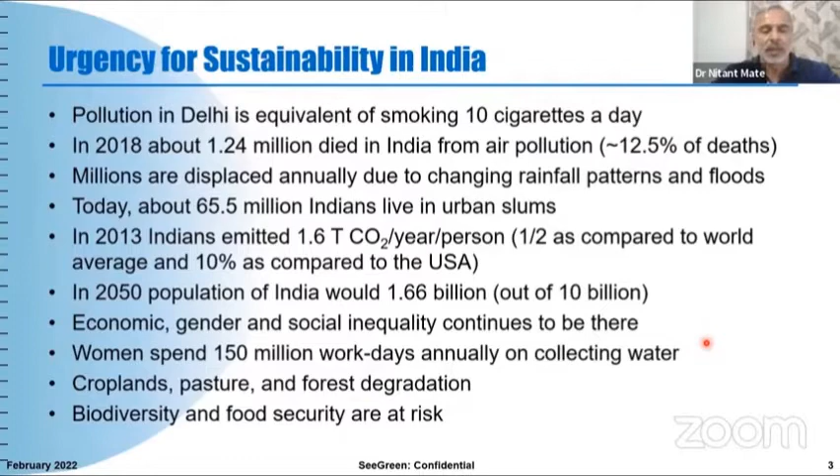We require energy for everything. We require fuels for domestic heating, commercial establishments, industries, fuel for transportation, commercial entities and institutions. We require electricity for lighting and other applications, and the list goes on. So we are definitely dependent on energy, and that is something we cannot run away from.

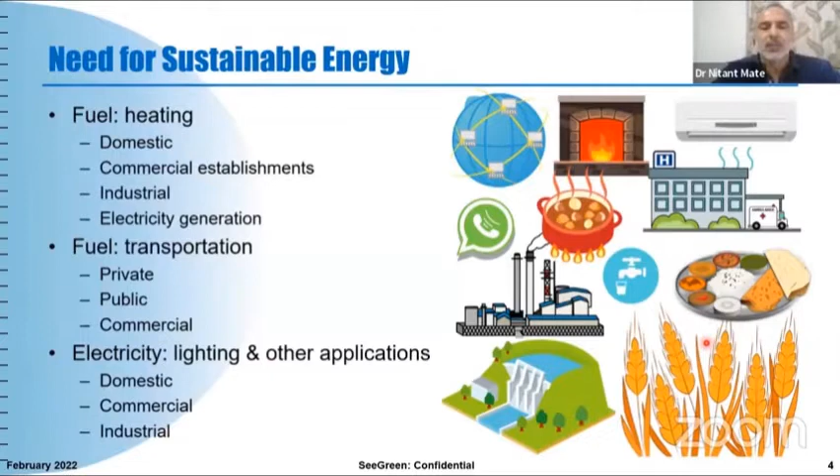And when we use energy, we get into the aspects of pollution. So when I'm talking about renewable energy, I would always look at emissions as one of the most important factors.

Also, when we look at energy, we have to look at sustainability of the energy sources and sustainability of the country as such when using that energy.

Otherwise, we start looking at one and we start creating problems in the other. The classic example - we solved our food problem by getting into the green revolution, and then we created a problem with the land by putting more and more fertilizers, reducing the overall organic carbon from the land, releasing all that carbon out, and that is also adding to the emissions today.

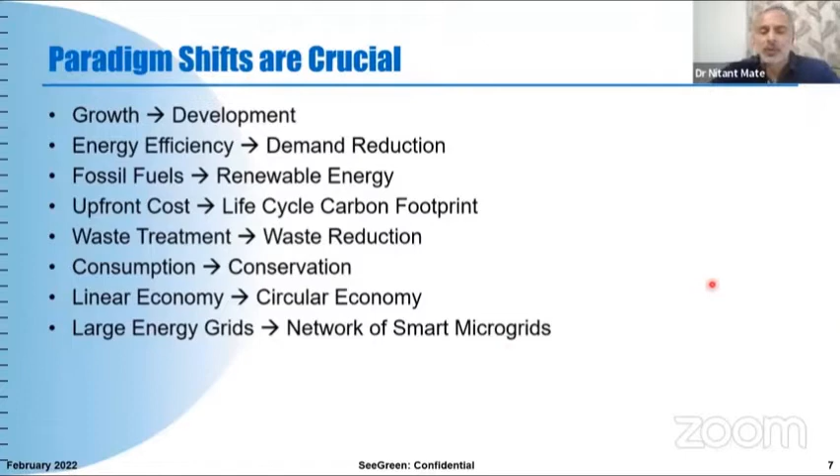Waste management is something we are looking at, but I think the first thing to do is reduce the waste - waste reduction is what we should be looking at. We are talking about consumption, we should be really talking about conservation, and then linear economy to circular economy. And I think the most important aspect in the whole thing is we are looking at large energy grids - instead of that, we should be looking at a network of smart microgrids. And that's the future of energy.

So when we start understanding energy, we have to also look at emissions. And here's a quick look at where we stand. Siddharth talked about scope 1, scope 2, scope 3 emissions - there is a pictorial representation of that.

Essentially, scope 1 is going to be what you burn in the zone that you are looking at. He talked about the Pune metropolitan region - so whatever you are burning in the Pune metropolitan region actually emits directly in the region. Even the solid waste that we generate adds to the waste in the Pune metropolitan region. Of course, the vehicles add to that and so on and so forth.

I think most importantly, scope 2, which was about 42% of total emissions, is something we should look at, because that comes from electricity which is not produced in the area where you're looking at the emissions. This is a very important aspect when looking at the total energy scenario of the country.

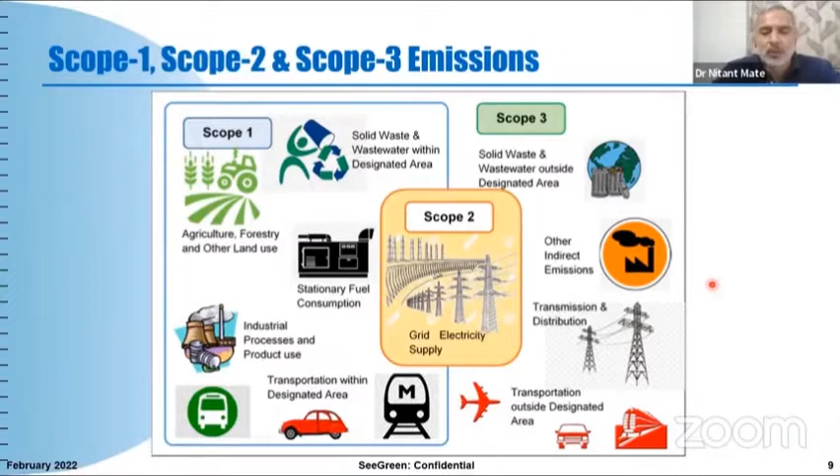Scope 3 emissions happen outside of the zone you're looking at, but they occur because of the consumption you're doing in that zone - be it food, transportation, traveling outside your zone, and so on. So let's quickly look at what is happening inside your zone in terms of emissions when you consume fuel.

This is a table I want to quickly explain. Any fuel you use typically is associated with emissions. The first column gives the fuel, and the last entry is electricity - I'll talk about that as well.

When you're using diesel, 1 ton of diesel actually emits 3.14 tons of carbon dioxide. If you're using gasoline, there's another number. CNG is 2.75, coal is 1.51. The last entry is electricity - every megawatt hour of electricity we use leads to 0.82 tons of carbon dioxide emissions.

You can also look at the calorific value of fuel and how much work that burning of that fuel will give you if that entire energy was converted into work - looking at kilowatt hours per kg of work at 100% efficiency. The numbers are great, but that's not the reality. That is not what is happening.

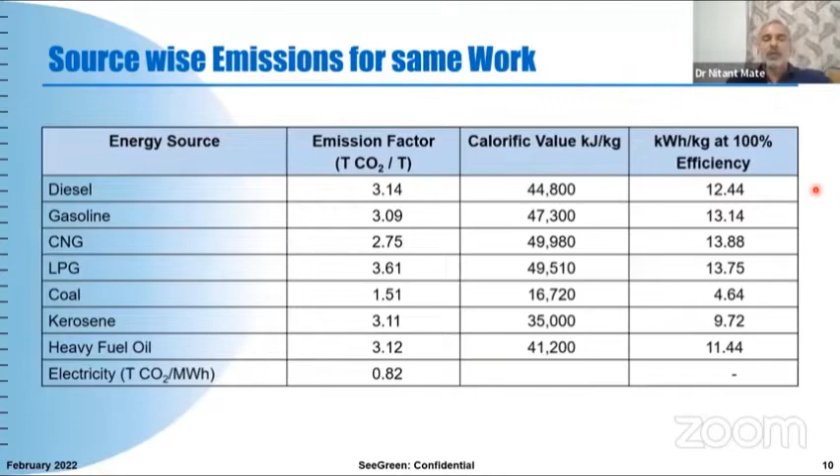Now if you look at this table, it's a table on 2 pages - a very busy table. I'll quickly explain. What you're looking at here is the different fuels in the first column, then the different applications we use the fuel for, and then the third column gives the typical efficiencies of these applications.

Then in kg, if I were to produce an output of 1000 kilowatt hours - that is 1 megawatt hour - from this particular fuel at this particular efficiency, how much fuel will I consume? And if I know the fuel consumed, I can calculate based on my earlier table how much I'm going to emit.

I'm putting this table in perspective because I want each of you to understand that if we want to do some work - say taking an elevator from ground floor to 10th floor - the work done is the same whether I'm using electricity, a diesel engine, a gasoline engine, or even steam. So how do we compare everything? I think the best way is to look at the output work we want, see what input we have to give, and then work out the emissions for that input.

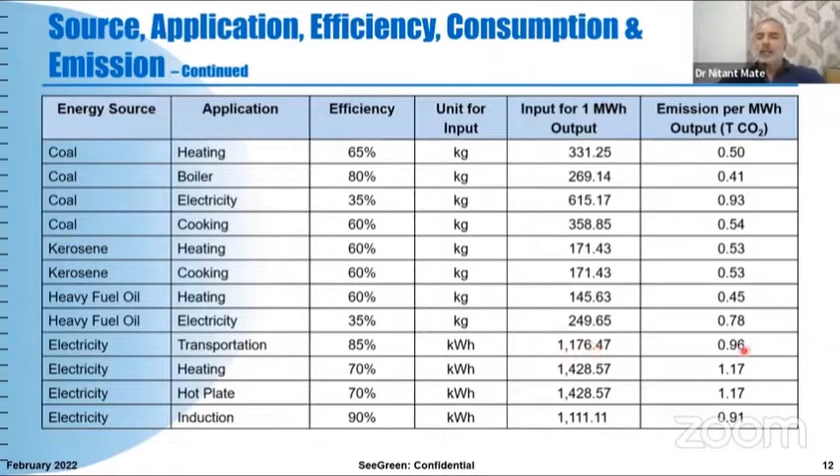If you look at transportation as an example - because I really want to drive this point home - using electricity for transportation, the efficiency is very high, about 85% conversion. If I want to produce 1 megawatt hour of output using electricity, I need about 1.1 to 1.17 megawatt hours of input, which leads to about 0.96 tons of carbon dioxide emissions.

Now I'll go back to the earlier part of the table and look at what happens if I use diesel for transportation instead.

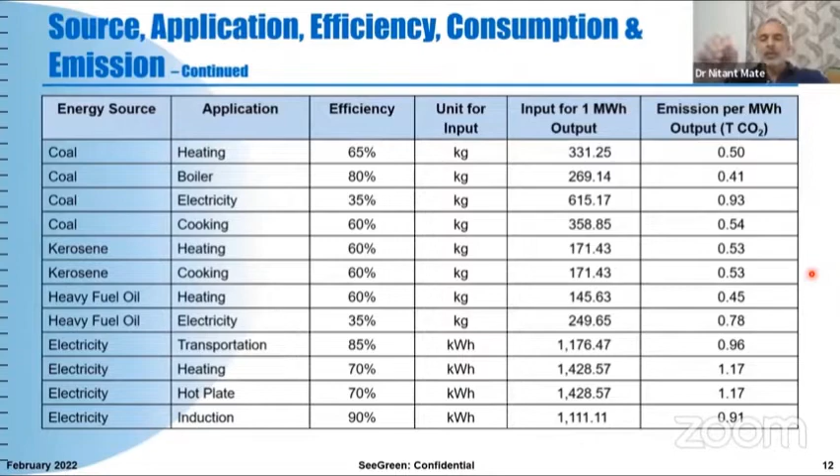And if I use CNG for that, my emissions are 0.57. So all of us are looking at electricity to be the least polluting input for transportation. But what this table is telling us is that for the same output, if we are using electricity for transportation, electricity is the maximum polluting entity. Now, this is completely counterintuitive, but it is very important for us to understand that there are two different aspects: one is energy efficiency and the other is emissions. And if we are looking at carbon neutrality, I think emissions take priority over anything else. That is something we have to keep in mind going forward.

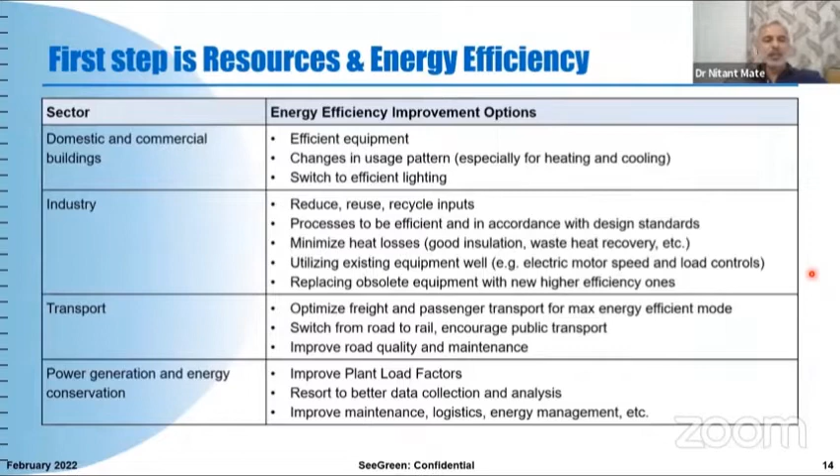So what are the solutions for that? And what are the sustainable solutions, and what are the solutions that are going to give us energy security? Of course, the first and most important thing is, as I said, efficiency for resource use. So we have to make sure that we don't consume too many resources. We have to look at energy efficiency, because renewable energy or anything else comes later. First is you reduce your consumption, and this table gives various measures one can take for domestic, industrial, transport. I'm not going to go into details of that, but energy efficiency is number one.

When we are looking at energy, we can look at energy and matter, and they are interconvertible. On Earth, if we are producing energy by using matter, then we have to remember that matter is finite, and we have to avoid doing that. There are a number of ways - there is gas, there are solids, there are liquids, you can burn them. Even nuclear energy is there, but all of them are finite resources.

Fortunately for us on Earth, we have an infinite source of energy, which is coming from outside of Earth, and that is the sun. So we should be finding ways and means of harnessing the sun. Of course, solar photovoltaic, solar thermal is there, wind, hydro, bio are all the ways and means of harnessing the sun.

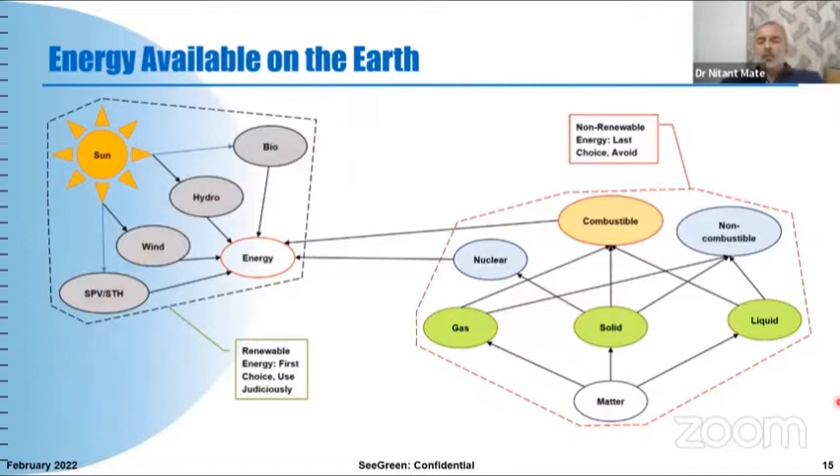What happens in India? Do we have enough sun? Do we have enough potential? Fortunately for us, India has got excellent potential being a tropical country. We have 3.28 million square kilometers. Our average solar radiation per square meter on Indian soil is 5.5 kilowatt hours per square meter. Now, if you look at this number, it is about 7.5 times the total annual energy consumption of India coming to us in a day. So I don't think there is any doubt that we have enough energy available. It's a question of how we use it.

Do we have sufficient rainfall? Yes, we do. 1.05 meters is the total average rainfall on the entire area of India. That is enough water to give 2 crop cycles, and probably have more for the third crop cycle, and enough to drink and enough to keep for the next year if there is partial drought. So it's a question of managing. We have large cultivable land that we can use.

Wind potential, of course, every year the wind potential is increasing because the technology is improving, and we have got about 300 gigawatts of wind potential at 100-meter mast height, and 700 gigawatt when it goes to 120-meter mast height. Bioenergy, of course, we have very large potential of 42 gigawatts with excess biomass that we have. And most important thing about India - we were talking about economics, we were talking about funding - we have a very large population. That means we have a large in-house market. We are 20% of the world. We have economy of scale. So we should not be looking at funding from outside. We should be looking at funding from within.

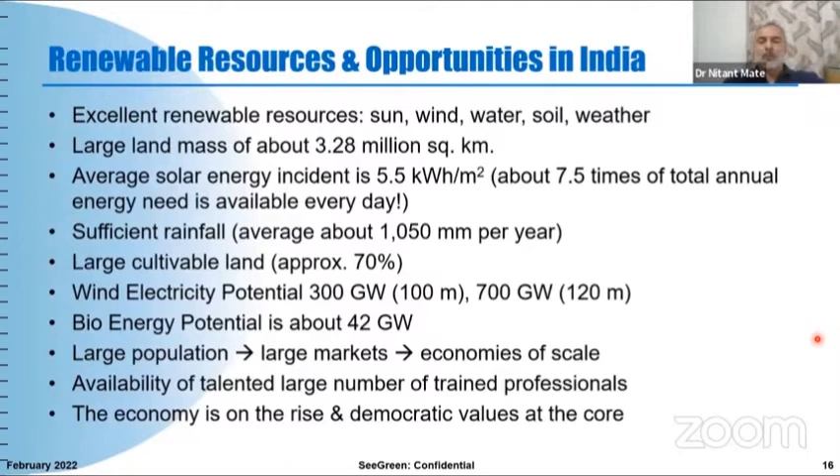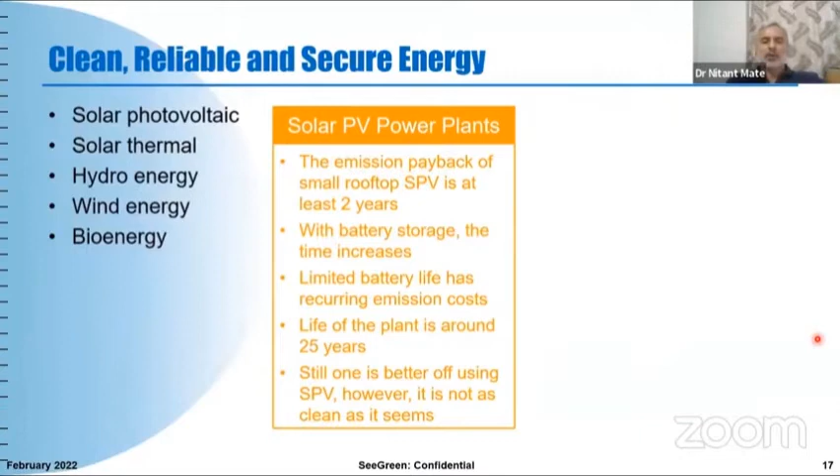So we have solar photovoltaic, solar thermal, hydro, wind energy, and bioenergy. What happens? Are these really green? Is something that we need to ask ourselves. Do they pay for their own emissions? And if you look at solar photovoltaic, it pays for its own emissions in at least 2 years. And bioenergy, if you take an example, it has got a life of 15 to 20 years, and it pays for itself in less than 2 years. So essentially, if you really want to go green, the first step that we need to do is focus on the core sectors going green.

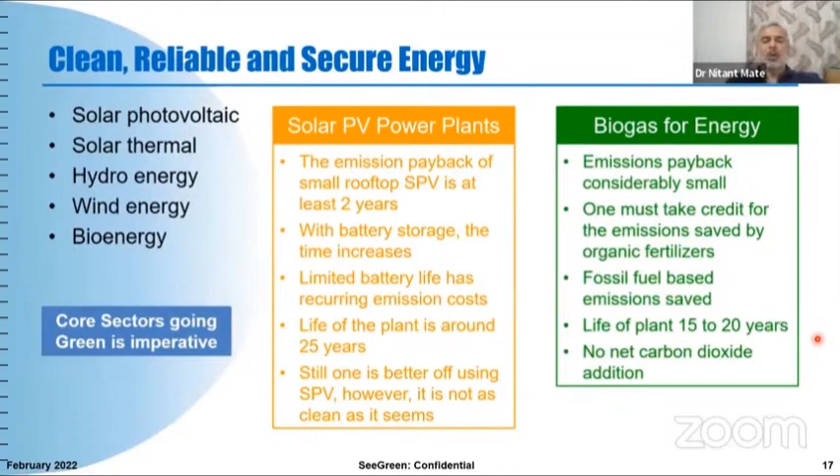And that is imperative, so your embodied energy and embodied emissions are green. Once that happens, I think we have started walking the path. And the economics of renewable energy, I'll wind up in a minute. I just want to spend a minute here.

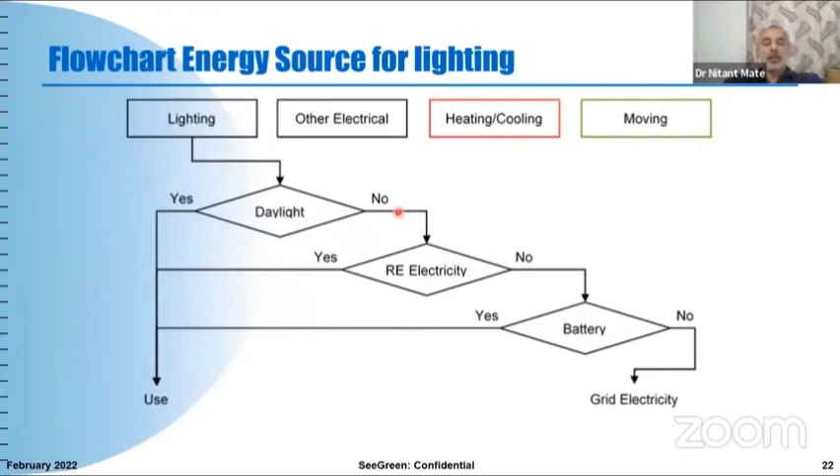So we have energy source selection. There are different applications: lighting, other electrical applications, heating, cooling, and moving. Here's a quick algorithm we can use. If you have lighting, go for daylight. If not, go for renewable electricity. If not, then go for battery. The worst is grid electricity.

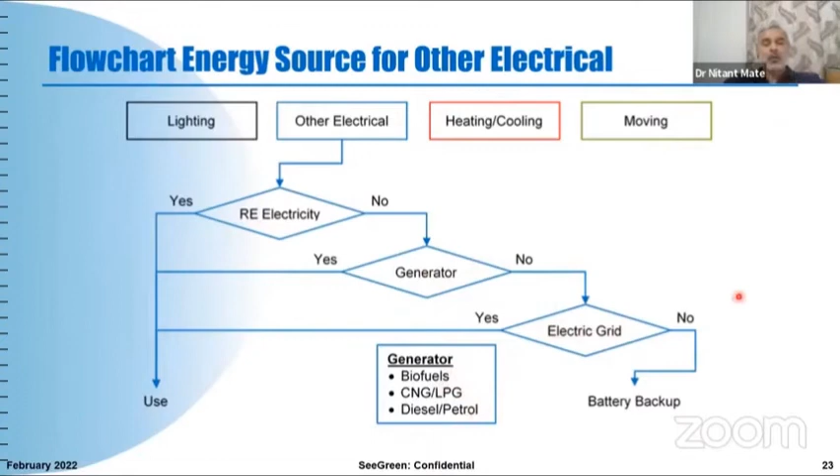Now if you have other applications of electricity, first of course go for renewable energy. If not, go for a generator using biofuel, CNG, LPG, or diesel. Then you go to grid, because today grid power is rather largely polluting.

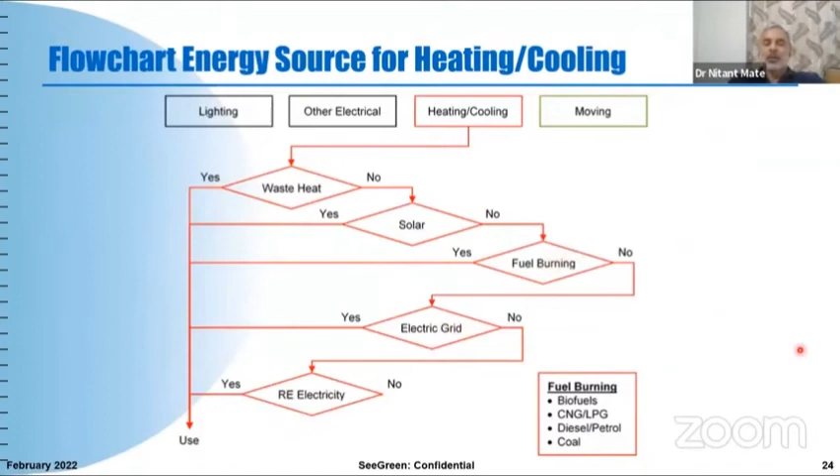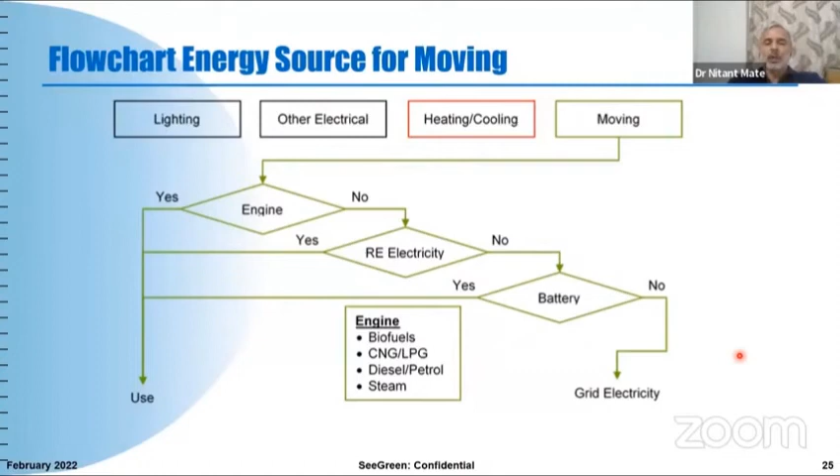So in a nutshell, if I were to walk a path for energy security, first I should start with 100% measurement of electricity, water, fuel, and other resources, and then drive the reduction using policies, regulations, acts, incentives, and penalties. Then go to reduced consumption of the same. For that, I need to do awareness building, behavioral changes, pledges, the economics, and so on and so forth.

Then I have to go to alternative sources, this is the third step. So renewable and sustainable, and we need to look at life cycle emissions, life cycle costs, economics. It is important because it's local, it is hybrid, and smart governance. Then the last step is the evaluation of whatever we have done. Look at per capita emissions, air quality, water quality, and so on. And then we have to look at the economics. Most importantly, look at energy, health, food, water, and waste as a collective entity, and then equitable availability.

Most important thing is renewable energy is decentralized, it is local. So there is autonomy at the local level, and that leads to energy security. And it is sustainable, it will increase our sustainable development index. Today, India is 120th on the list of 165 countries. And if we do all that, we will end up developing a network of smart microgrids for sustainable alternatives, for an energy secured and sustainable future of the country. Thank you so much.